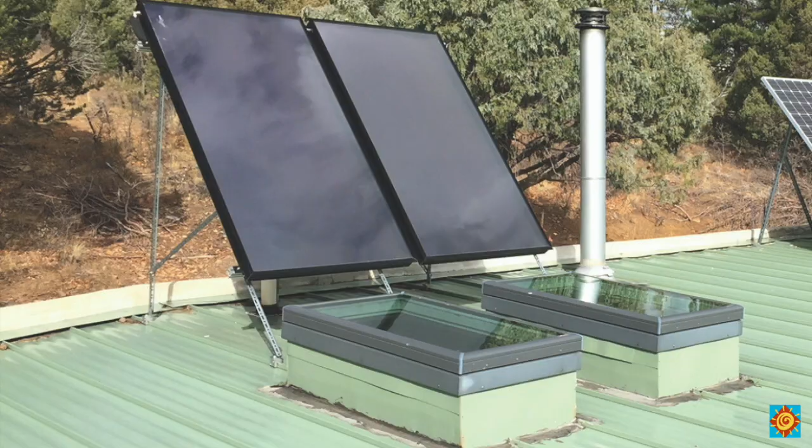So we put our house on the feeble housing market, hoping to squeeze enough equity out of the sale to build a small, self-sustaining, off-grid home. The kids and I, together with a talented carpenter, his wife, and some helpers, built Twisted Oak, a home that heats and cools itself with the sun, collects our water, heats that water with the sun, and generates all of the power we need with a small solar array.

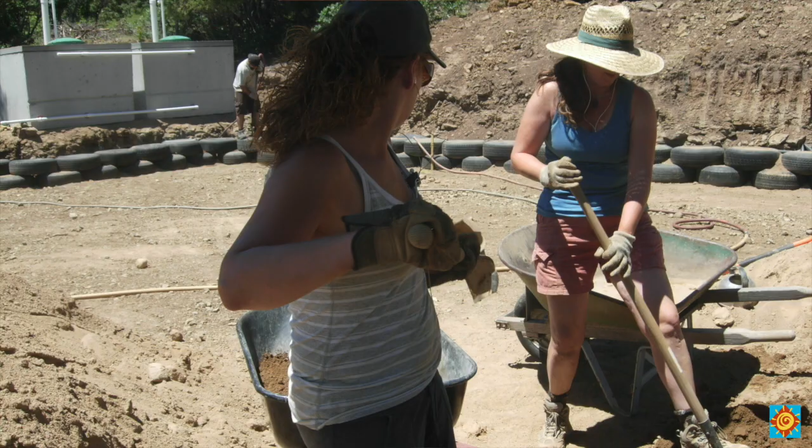By recycling our gray water, we enjoy an indoor jungle in a semi-arid climate. And by incorporating a composting toilet, we can responsibly recycle our waste back to the earth. By designing this home ourselves and putting our labor and elbow grease into it, we eliminated a mortgage and our monthly utility bills. Twisted Oak gave us a new lease on life.

Building it with our hands nourished us as we began our healing process. We created a new life that rewarded me with the freedom of spending time with my kids while they were young, instead of working at a stressful job with a stressful commute. The unexpected results were discovering how living more connected to the cycles of nature creates immeasurable abundance, while lessening our impact on the planet.

Just a few years before we built Twisted Oak, I couldn't even imagine the life that we have now. I was working in Seattle as a structural engineer, and I was married. I had a husband, 2 kids, a mortgage, and a bunch of utility bills.

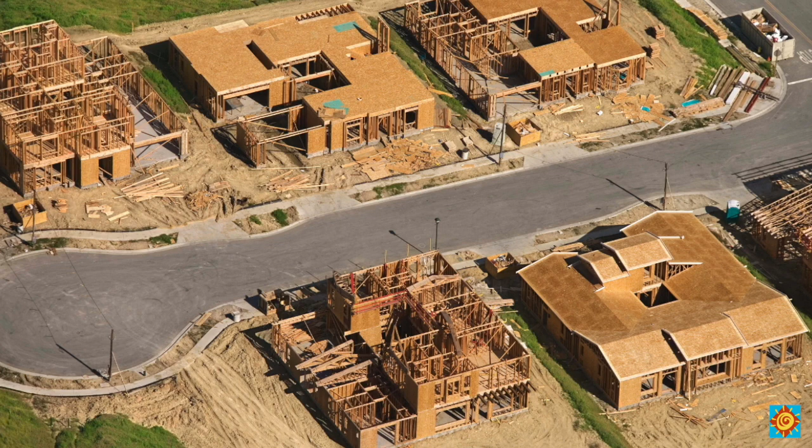And I was working in the structural engineering world where I was providing engineering for new homes that were under construction. And I would often go to these construction sites and I would see these stick-built homes and an enormous amount of waste going into huge dumpsters. And I just became aware that we need to really think about how we're building our homes.

I really believed that there had to be a better way, especially when I realized that so many of the materials that were used in these homes are toxic. They're unhealthy for us, they're unhealthy for the planet.

So I set out to study, and I began studying everything I could find. I took workshops on passive solar design. I started reading books about natural building. I studied permaculture and organic gardening, and I really became passionate about finding new ways in order to build homes that were healthy for us and healthy for the planet.

So the day that my son came to me and he said, 'Mom, I think we should move.' And I asked him, 'Well, where would you move?' And he said, 'Somewhere sunny.' So in that moment, everything really changed. And I realized that we had a great opportunity.

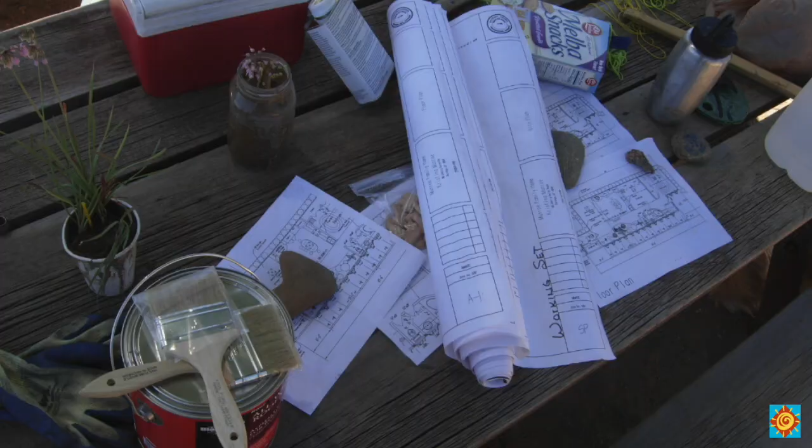We had an opportunity to take everything that I had been studying for so many years and design and build a house for us. A house that would really demonstrate to others that a family really can live self-sustaining, live an abundant life with all their needs taken care of and the modern conveniences that they needed, and still leave a low impact on the planet and do it affordably.

We packed our bags and we moved to Durango, Colorado, which was my hometown, to build the home that we live in now, and we named Twisted Oak.

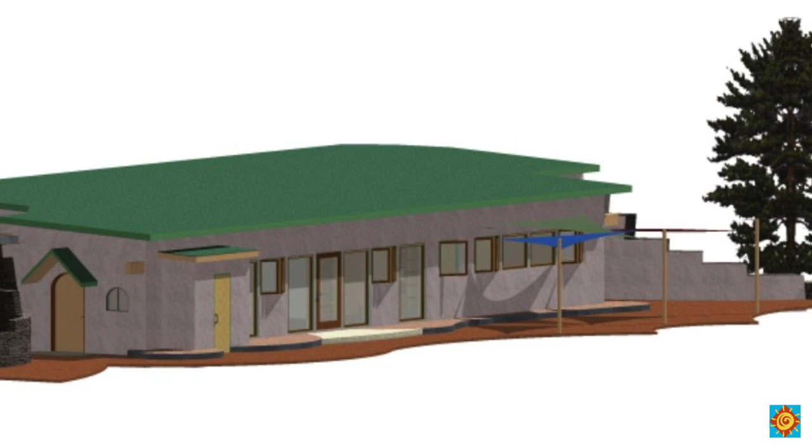Now, I was an engineer and I knew how to design and draft up drawings for a house, and I had done so much research that I knew what I wanted to incorporate into the house. But I was not a carpenter. I'm not an electrician. I'm not a plumber. And I knew that I was going to need some help.

Even though I really wanted to participate in the labor and be on the job site every day working, I knew I wasn't qualified to really build the house from scratch with my 2 kids.

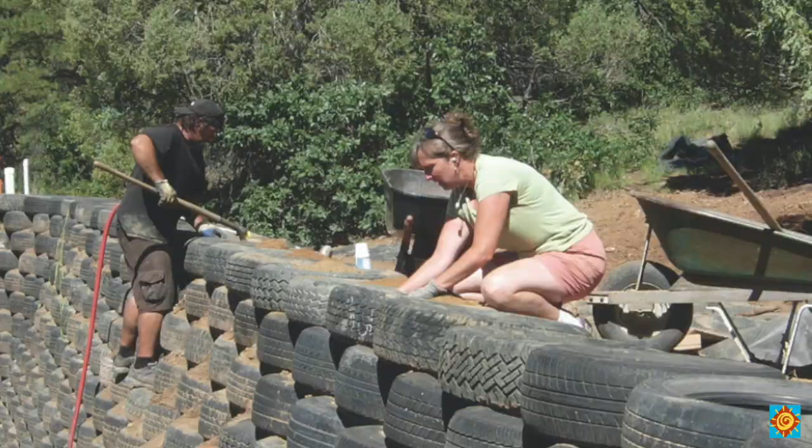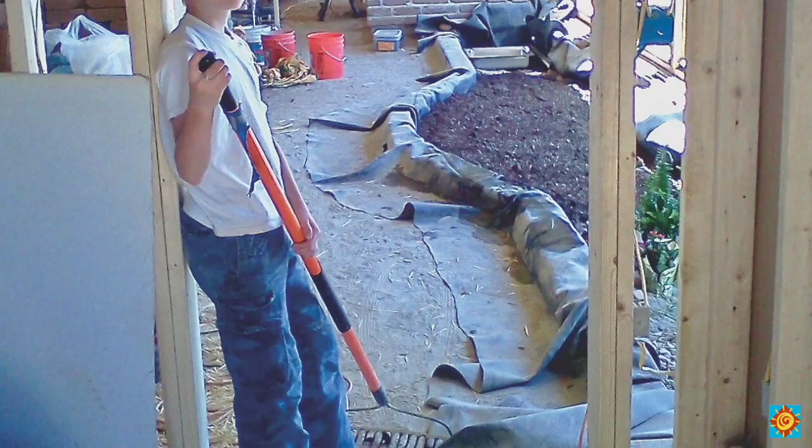So I was so lucky to find this amazing carpenter. His name was Mike, and I ended up hiring his wife as well. The three of us, together with the two kids, packed over 700 tires to create the back wall for our home. Mike and I continued to work through the entire project as co-conspirators, where I would do the research and a lot of the grunt labor, and he brought his skills as a carpenter and builder to the table. We really co-created this house together.

We had to hire extra people when we needed it, but for the most part, I participated in and gave as much labor as I possibly could to the project, as well as the kids. They were on site almost every day.

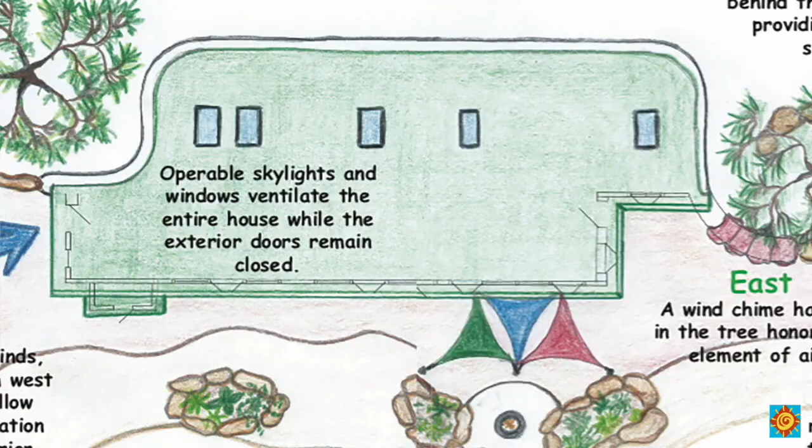So I built out of tires for several reasons. Probably the most important reason was that the site we were building on is sloped, and that lent itself perfectly to what I call a bermed house, meaning that part of the house is buried and there's earth behind the back side of the house. There are only a couple kinds of materials you can use to create a bermed home, and one of those is tires.

Tires are basically free, and you don't have to use concrete. Concrete is very expensive and not necessarily considered a very green material. So I saved a lot of money. I was able to build with these sweeping curves that you can get with tires, instead of just a straight wall like a typical concrete basement wall might be.

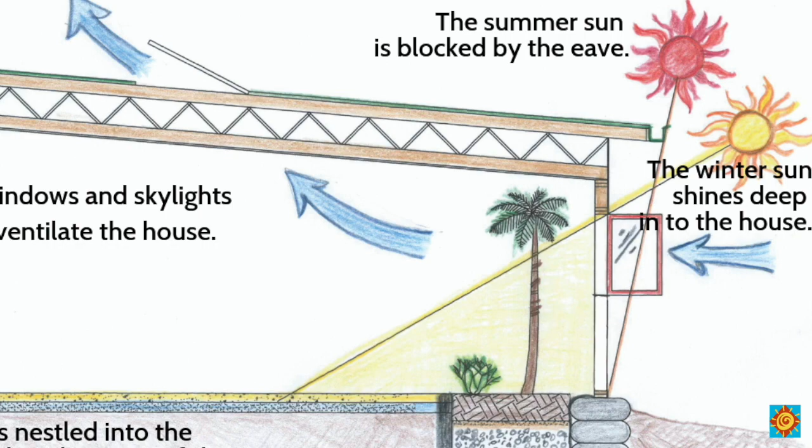I incorporated passive solar design into the house, and I would have incorporated passive solar into any type of house I was building. We did that by putting most of the windows on the south side. I didn't put so many windows that the house would overheat - I actually used far fewer windows than you often see in a lot of passive solar houses. This keeps the house really cool in the summer, and it doesn't overheat in the winter.

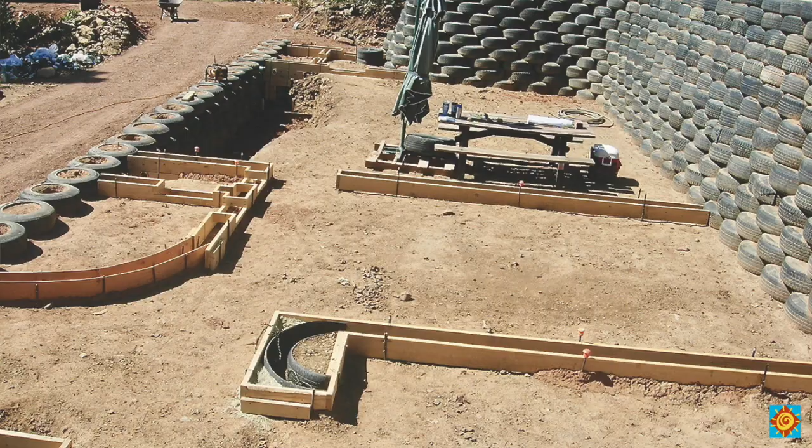I also incorporated materials that store and regulate heat - dense materials like a concrete floor, adobe blocks around the bathing room, and of course that thick, sturdy tire wall that makes up the entire back side of the house. These dense materials help regulate the temperature and heat in the house. It keeps it from overheating, and it keeps it nice and warm in the winter.

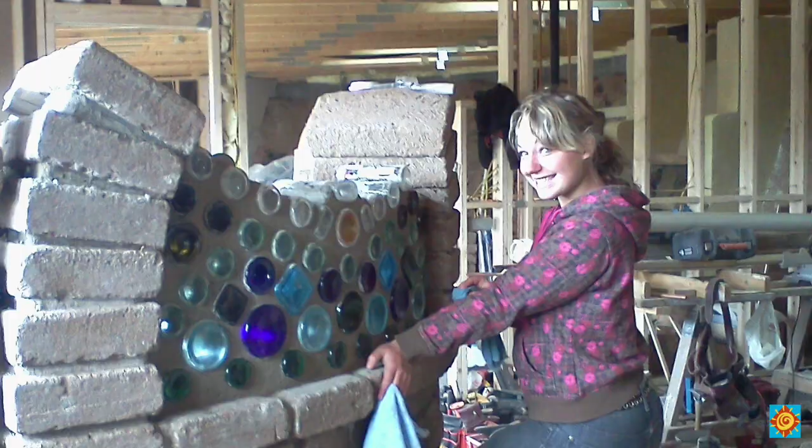We also built with as many recycled materials as we could - we used tires, we used bottles. I found this amazing set of kitchen cabinets at a garage sale. We also found a really stunning door that I could have never afforded if I'd had to buy it new, but it was at a garage sale. It was slightly warped, but it worked perfect for the door going into the systems room.

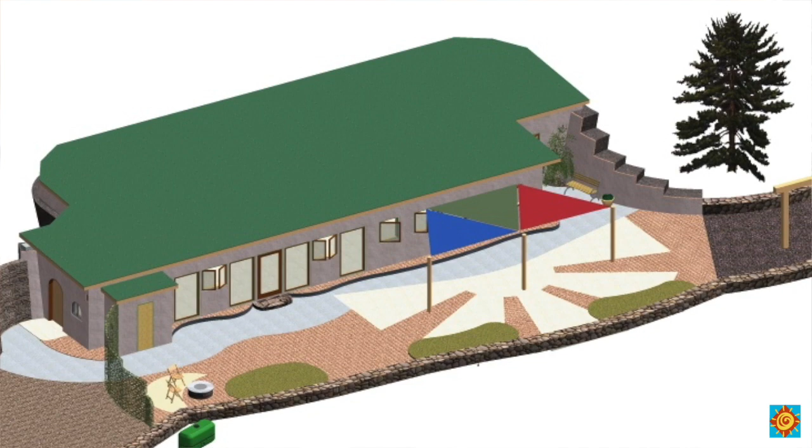We also incorporated water catchment into our house. That means we collect all the rain and snow that lands on our roof, and that runs into a couple of cisterns. The water is stored in the cisterns until we need it, and then we run it through a filtering system.

There's additional filtering at the sinks where we brush our teeth, and we use the water for drinking and cooking. In Colorado, there are some pretty stringent laws about water catchment, but we were lucky enough that all the pieces fell together and we actually qualified for legal water catchment for our home.

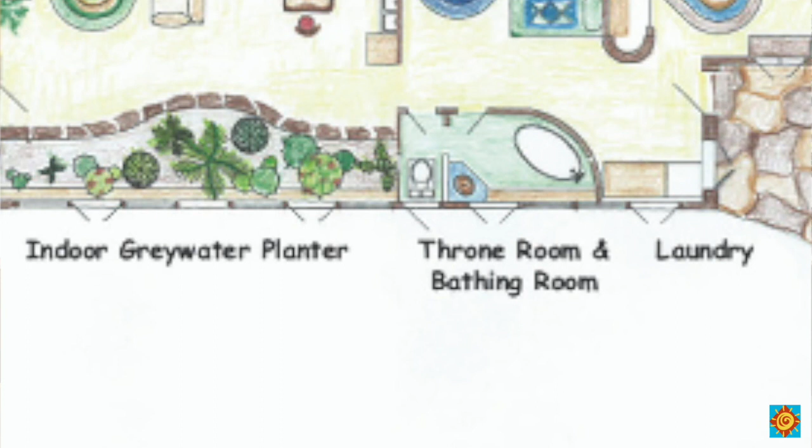One of my favorite features of our home is our greywater planter. All the water from our sinks, showers, tub, and washing machine runs into a huge planter that runs across the living room.

This planter is full of gray water, which is perfect for growing plants. So we have beautiful blossoms and flowering plants year-round inside the living room. It's like having a jungle, and this is really a luxury because we live in a very arid climate, so having a jungle indoors is quite nice. By having a gray water system and a composting toilet, we eliminated the need for a really expensive septic system.

Many people think that living off the grid means living in lack and disconnected from society, and I've just found that not to be true. I find that living with more awareness to our natural resources, being more connected to nature, to the water that we collect, to the power that we generate, and living abundantly within those cycles and with what's abundant in nature has led to a much more fulfilling and conscious lifestyle.

I really wanted my kids to not be taken away from modern life and unable to function, but I wanted them to also live in a world where they were conscious. That when they turned on the water faucet, they realized that water was caught on the roof and stored in tanks. And when it's really dry and hasn't rained for a while, we have to watch our water consumption a little bit. And when it's raining and there's lots of snow, we can take long showers and big bubble baths. That's an awareness that most people don't have in this society anymore.

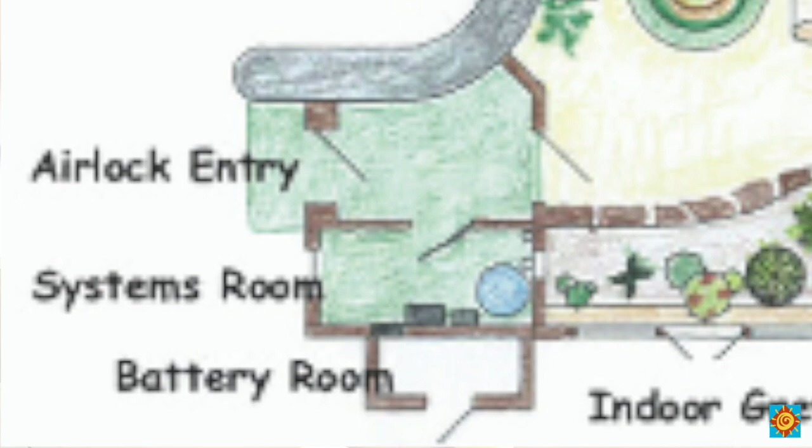When you come into our home, the first thing you enter is what we call the entry room, which is kind of an airlock. You come through the outside door and close it, and there's a place to take off your coat and shoes. Then there's another door, a glass door, that leads you into the living space. Having these two doors set up this way allows us to maintain a better temperature in the home, so the many times the dogs go in and out, we don't lose the heat in winter or the nice cool air in summer.

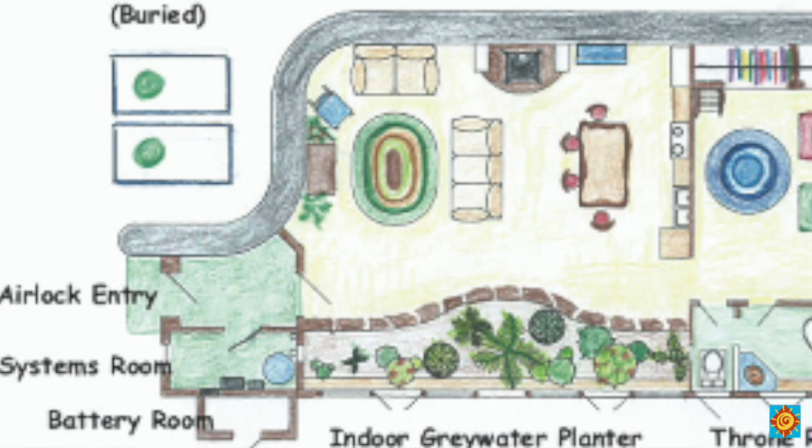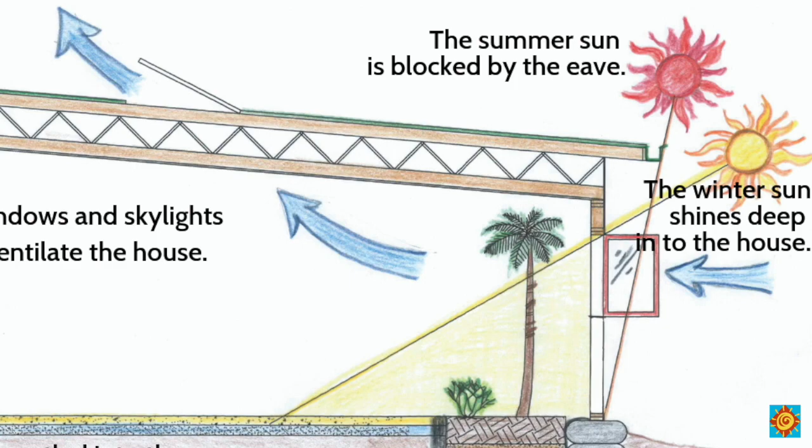When you come into the main part of the house, I designed that as a great room. We have a big open space, which is great for passive solar. We have windows running along the south side of the house, but not too many to overheat it. The sun floods in during winter and comes deep into the house across the concrete floor, and the concrete floor absorbs all that wonderful winter sunlight. All the tires, adobe, and natural plasters absorb that heat in winter, which helps keep the house warm. In summer, there's an eave over those windows so the summer sun doesn't come directly into the house, which is one way we keep it cool.

All these tires and this dense material also help keep the house cool in summer by regulating the temperature. Now, the kitchen has a huge table, and that is really the heart of the home. We spent so much time when the kids were younger doing school at this table, eating and cooking, and this is really the heart of the home, so I wanted to make it a special place. Even to this day, now that the kids are grown and off to college, this is still the center point of our home.

Now, the bathing room, as we call it, is the home to our clawfoot tub. This room is surrounded by adobe blocks, and this is even more of that material I've talked about, where the sun comes in and is absorbed and then released in the evening as the temperature starts to drop. So our bathing room, even though it doesn't have any kind of mechanical heating system, is always a warm and wonderful place to take a bath.

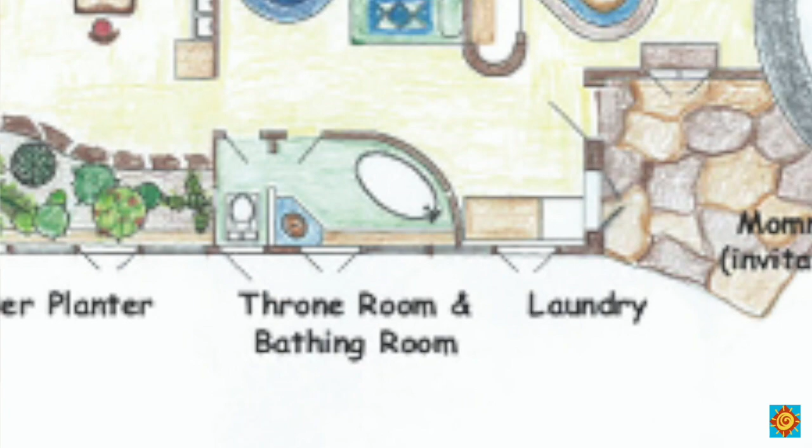Now, we named the other part of this room the throne room, because originally we had a very large and cumbersome composting toilet, which we've luckily replaced with a much simpler toilet. It's much easier to take care of, and it separates the liquids from the solids. We call that the throne room, and it is separated from the bathing room. Since we only have one bathroom, it makes sense to separate those two rooms so you can do your business without being disturbed by someone else.

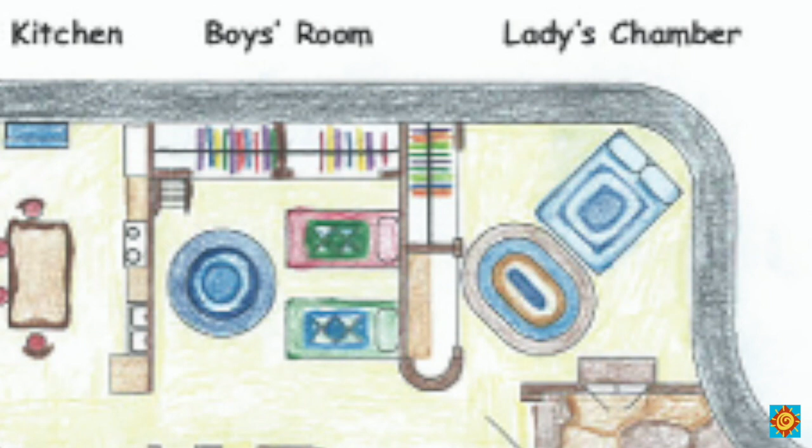Next are the kids' bedrooms, which is now my office. Now that the kids are gone, we created a space so that it could transform as life changed, because life never stays the same.

The other room at the end of the house is the most private of all the rooms, and that is what I labeled the Lady's Chamber, and that's my bedroom. Now that I have a partner, we share that bedroom. The one thing I really wanted to do in this house was create lots of usable storage, so we have two full-size closets in that room. It's at the end of the house, so there's a little bit more privacy—a quiet place to go play music or meditate, or just be away from the rest of the house.

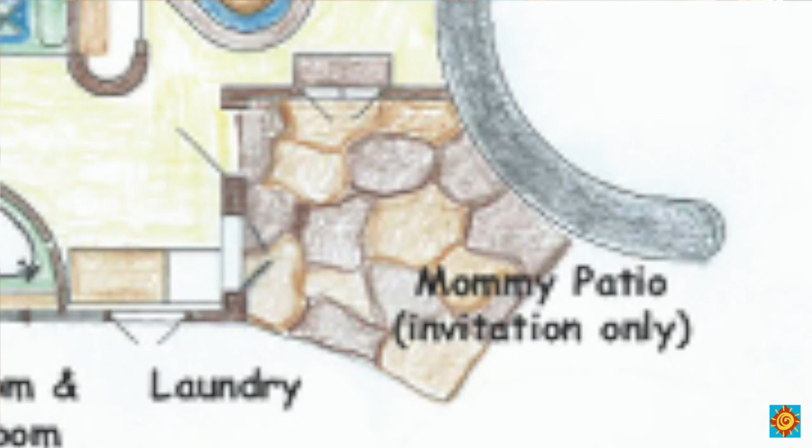One of my favorite places is a little piece of heaven I carved out at the end of the house, next to my bedroom. Very early on, we all named it the Mommy Patio—invitation only. This was a space where I could go and just have some peace and quiet. As a single mom, it was really important for me to have my own special space, but what ended up happening is I always wanted the kids with me anyway, so we spent a lot of time out there. Even during construction, I created this space as my little haven and decorated it with flowers—a place that felt like a little piece of civilization during all the construction.

Now, I've been living off-grid for many years now, and it just feels like the most natural way of life. I can't imagine living any other way. I really believe that anyone who puts their mind to it can build a sustainable home too. You don't have to build off the grid to reduce your impact on the planet and your wallet—you can build the same kind of home on the grid and drastically reduce your mortgage and utility bills.